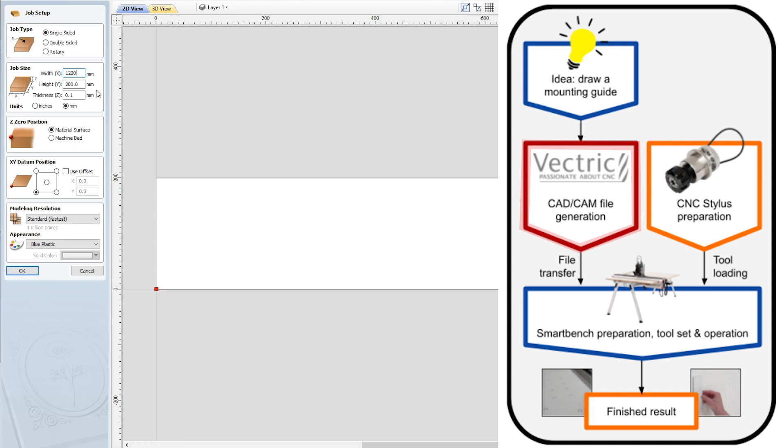We're first going to take you through creating a toolpath using Vectric and the drag knife gadget. Next, we will focus on setting up CNC Stylus with the vinyl cutting cartridge, including selecting the correct blade type for the vinyl we're using, and then setting a blade depth.

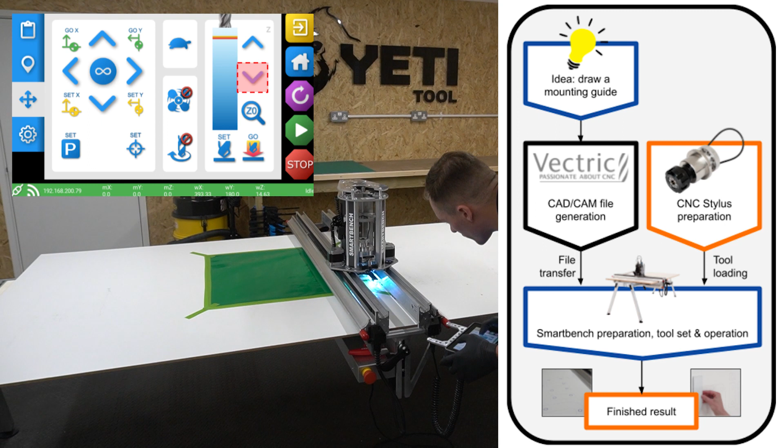We'll then go through the operation of SmartBench, which starts off with setting an XY datum, setting a Z datum, and then starting the job right through to completion. This tutorial will be split into two sections. Part 1 will focus on file generation, and Part 2 will focus on SmartBench operation.

Before we can cut files, we need to do the design work in some CAD/CAM software. The CAD/CAM software will then export the toolpaths for SmartBench.

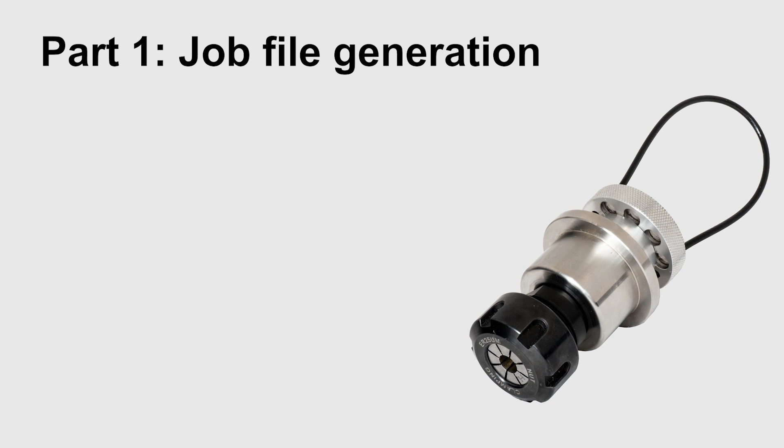So for Part 1, file generation. For this tutorial, we'll use Vectric VCarve Pro for our CAD/CAM software. Vectric works by defining a general job setup, drawing out basic features in 2D, assigning toolpaths to the drawn features, and exporting the toolpaths to a file.

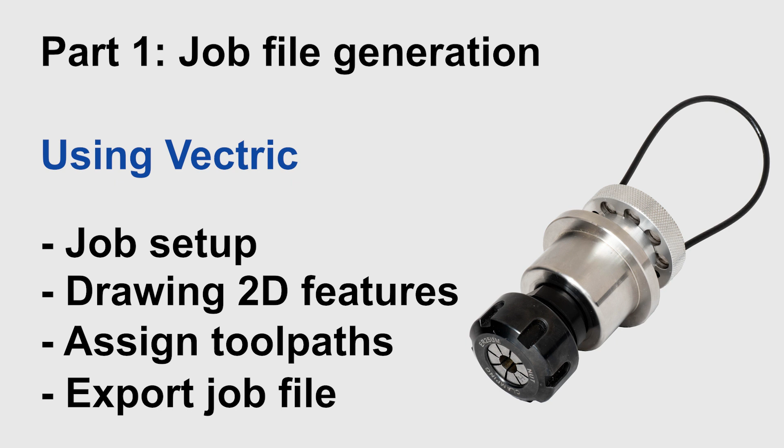Let's get into it. So we're going to start in Vectric by creating our job setup. We're going to first create a new file. So we click New File up here. Once we've created the file, we can now select our job type. For this, we're going to use single-sided.

We're now going to enter our width in the X-axis, which is this axis across the bottom of the screen. And we're going to type in here 600 millimeters. And then we're going to set our height, which is in the Y-axis, to 560 millimeters. And our thickness in Z will be 0.1 millimeter.

We'll then choose material surface as our Z datum position. And our XY datum will be the bottom left-hand corner as shown on the screen here. We can then press OK, and this will now create our job setup.

Once we've created our job setup, we need to now import our vectors, which will be our animal stickers. We can now press Import Vectors, which you'll find under File Operations, which will open our open window. We can now click Animal Stickers, and we can press Open. This will now open our stickers, and you can see here they are individual vectors.

We now need to group our stickers, so we can use the mouse to select them all, right-click Group Objects, and these will now operate as one individual object. We can now go to Edit, Align Selected Objects, and Center in Material to ensure these are centered to our job.

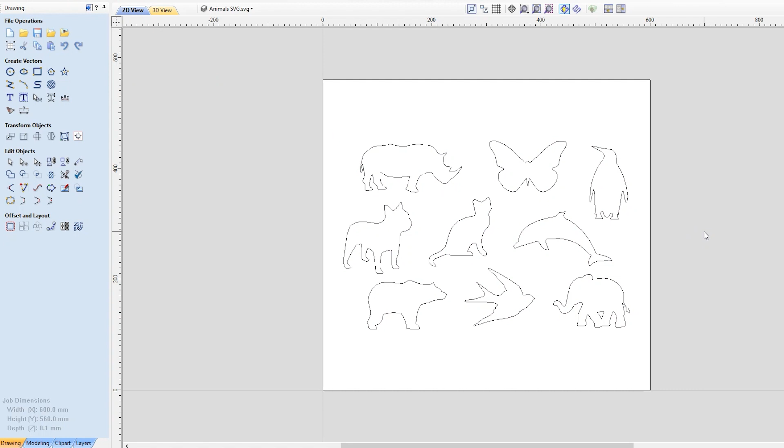Before we create the drag knife toolpath, we now actually need to separate these back into their individual objects. We're now going to select the object again, right-click, select Ungroup Objects, and ungroup back to original layers. And you can now see the objects are individual. This will allow us to create our drag knife toolpath later.

When we create a drag knife toolpath using the gadget in the next step, we can use a dummy tool. This means we do not need to add a new tool to the database. Here we can select any tool. In this case, we're going to select the end mill 0.1 millimeters.

It's important to note here that the gadget will automatically calculate the toolpath from the center of the tool, so we do not need to worry about the diameter of the tool. Your tools can be found up here in the Toolpaths tab, Tool Database, and you can see our tools here already created.

We are now going to create a toolpath using the drag knife gadget in Vectric. This comes pre-installed into Vectric, so you don't need to install anything. The drag knife toolpath is needed as we need to accommodate for blade offset, which I'm going to explain to you now. Blade offset refers to the tip of the drag knife and the offset.

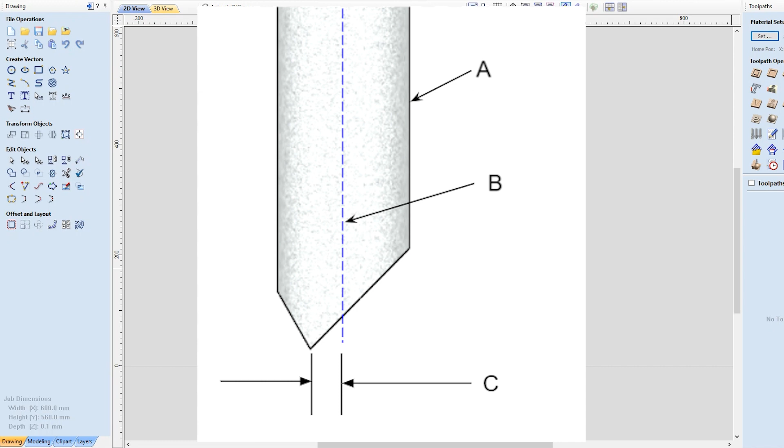The tip of the drag knife is offset by a small amount from the pivot center of the tool. This allows it to swivel as it cuts. This offset value specifies the distance between the central axis B and the tip C. It's important to note here that the offset we'll be using is 0.2 millimeters.

So we're now going to create our toolpath. We do this by first selecting all of our objects. We can do this by clicking and then holding Shift between clicks to select each individual item. Or we can use our mouse and drag and select these as a whole.

Once we have our item selected, we can go to the gadgets at the top, click on Drag Knife Toolpath, and then we have our drag knife toolpath window. Here we need to enter the following values. So we're going to use a cut depth of 0.1 millimeters. And we're going to use a swivel depth, which is the depth at which swivel actions are inserted, as 0.05 millimeters. This should be shallower than the cut depth of the appropriate tool.

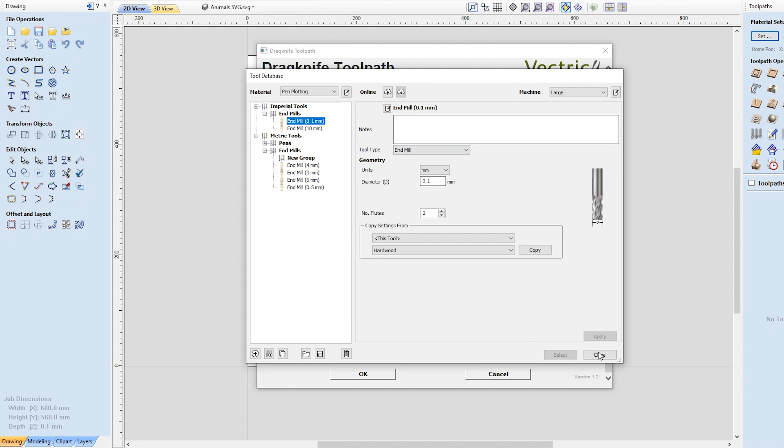Passes will be set to 1, and we can untick the vector start points box. Our blade offset, as explained earlier, is going to be 0.2 millimeters, and our tolerance angle will be 10 degrees. Here, as mentioned before, we're going to use a dummy tool. We already have here selected a 0.1 millimeter end mill, which is in our pen plotting tools we created in the earlier video. We can now press OK, and this will calculate our drag knife toolpath.

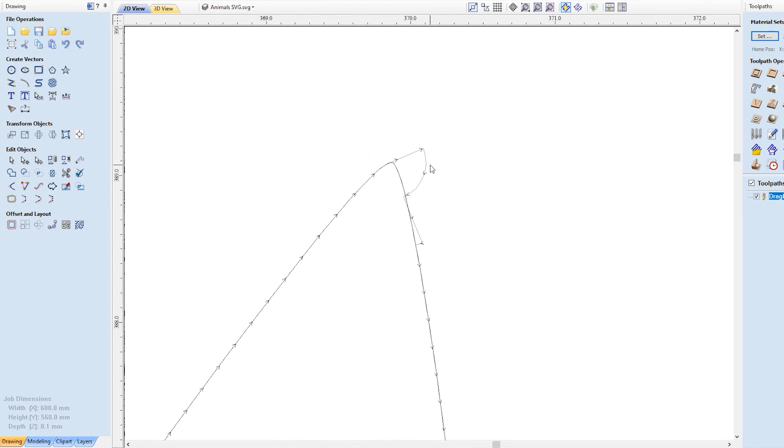If I zoom in on these sections, you can see how the drag knife toolpath is different as it adds extra movements for swivels. You can see this on various different corners. Our drag knife toolpath is shown over here. So now we have our toolpath. We're going to export this as a GCode file for SmartBench to understand. We need to first select our toolpath, which will then be highlighted in blue under the toolpaths.

And now we can press save. We're going to make sure we are saving the selected toolpath, and the toolpath name will be shown here, which will be saved. We can select our post-processor as Yeti Tool SmartBench, and we can now press save toolpath. We can save our toolpath here. In this case, I'm overwriting a previous file called animal stickers, and press save. We're going to press yes to replace the file. This has now saved our GCode file, ready to transfer to SmartBench.

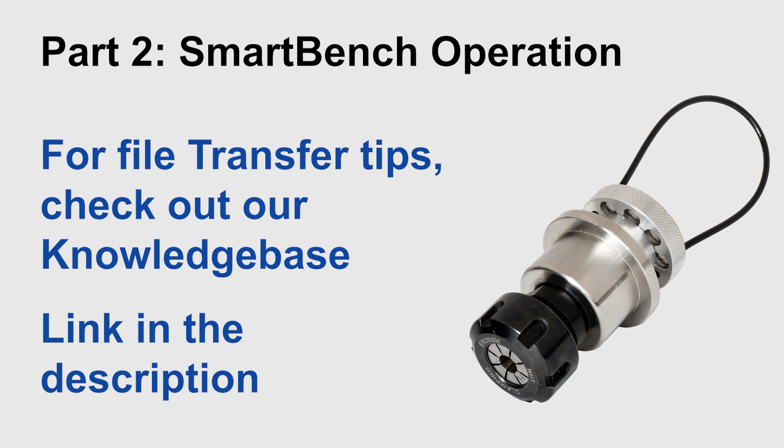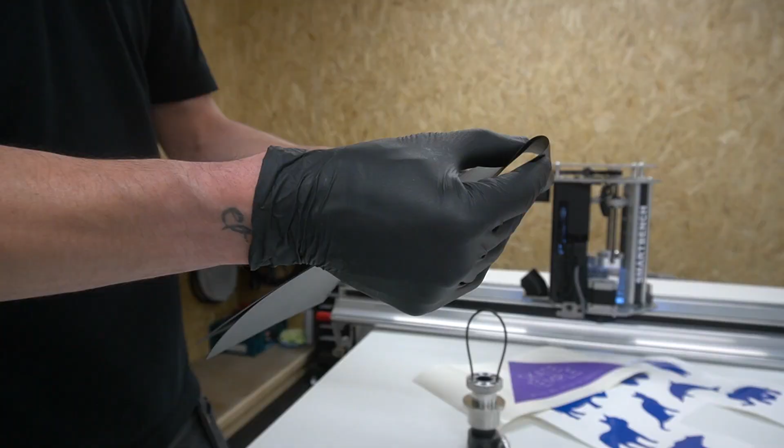Before we get into the technical data, let's look at different types of vinyl. There are 3 different main types of vinyl. There is self-adhesive vinyl, which is perfect for signage and branding. This comes in many different colours and thicknesses, which normally has a paper backing, which you can then peel away. You can also process heat transfer vinyl, which is great for t-shirts and clothing. Heat transfer vinyl does not have an adhesive backing, instead is fused to clothing using heat such as an iron. You can also source much thicker, rigid vinyl, which comes in a varying range of thicknesses.

CNC Stylus has been designed to process thinner materials such as self-adhesive vinyl and heat transfer vinyl. We're going to focus on these in this tutorial. You can potentially process thicker, rigid vinyls, but this needs to be taken with a different approach. One more thing to note is where can you buy vinyl from? You can buy vinyl from most online shops.

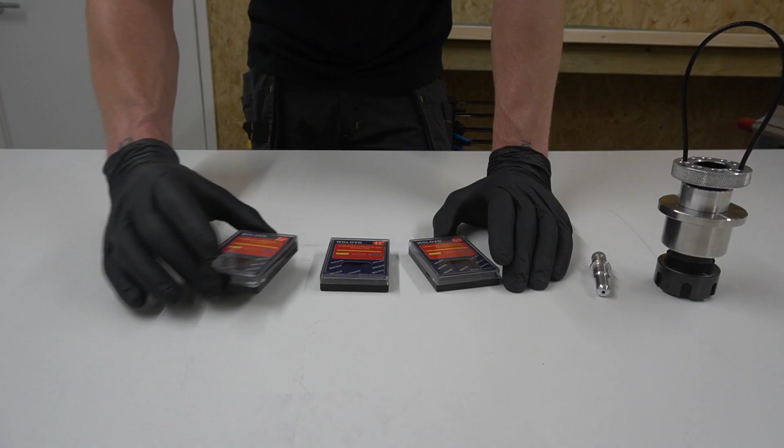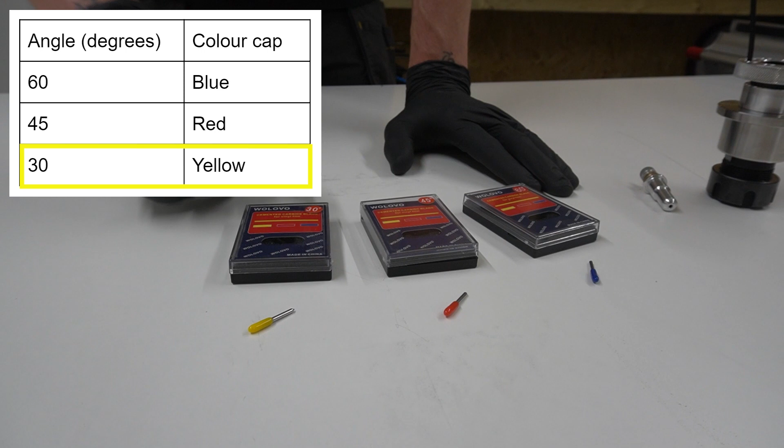What blade should I use? There are 3 different blade types, which are defined by their angle. We've included different blades in the box, which are 30 degree, 45 degree, and 60 degree blades. How to identify which blade is which? Blades ship with a protective cap, and its colour indicates the blade angle. Watch out though, because these can easily be mixed up. Yellow indicates 30 degree blades, red indicates 45 degree blades, and blue indicates 60 degree blades.

What are the different blade types used for? The steeper the angle, the deeper the blade can reach, such as 60 degree. Therefore, this is used for cutting thicker materials. However, this can add more cutting load and can sometimes cause tearing. A shallower angle, such as 30 degree, has less cutting load. This cannot reach as deep and therefore is used for thinner materials. A good rule of thumb is to use as shallow an angle as the thickness will allow. How do I change a blade? The blade sits inside the vinyl cartridge and is held in place by a magnet which sits on a bearing.

This allows the blade to swivel and rotate. The blade can be removed by pressing the ejection pin and pulling the blade out from the cartridge. To reload the blade, simply push the blade back into the hole. When you finish using your blade, be sure to replace the protective cap. This will stop your blade from getting damaged or blunted, and the colour will help identify the blade angle.

What spoil board should I be using? For this project, we're processing thin vinyl, so we can actually use the same technique as we used for drawing with CNC Stylus. We're going to show you a few clips of those videos now. Although we're using paper, it's exactly the same for using vinyl.

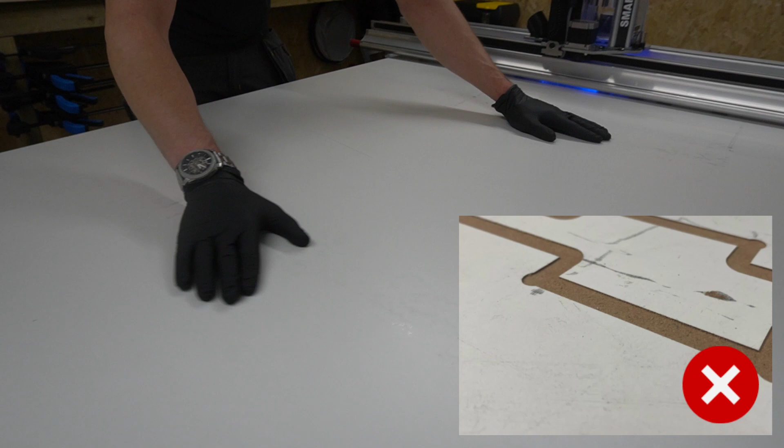When drawing with CNC Stylus, we need to ensure we use something rigid and flat. We'd recommend using a 12mm double melamine faced MDF board. This is to ensure we have a smooth surface to draw on and a smooth surface for our lower wheels to roll along.

Do I need a self-healing mat? If you are only drawing or cutting thin materials which have a backing paper, then you only need a flat, rigid spoil board as discussed earlier. If you're cutting rigid materials all the way through, or if you're locking out the movement of CNC Stylus, then you may require a self-healing mat which you can bond to your spoil board. In those examples, that would allow the blade to punch all the way through the material without blunting or damaging the tip.

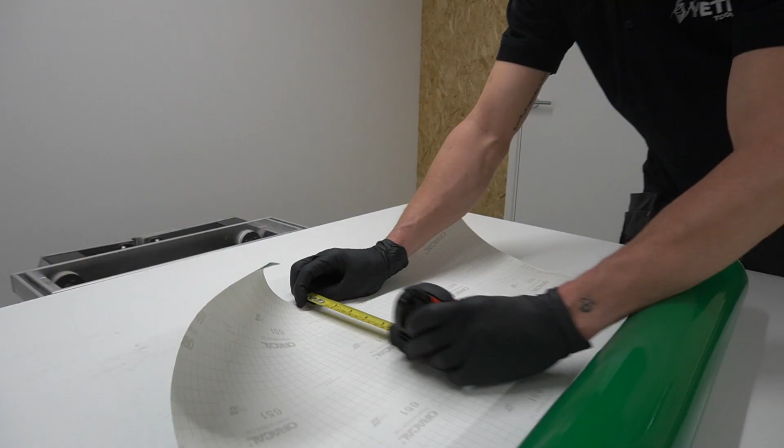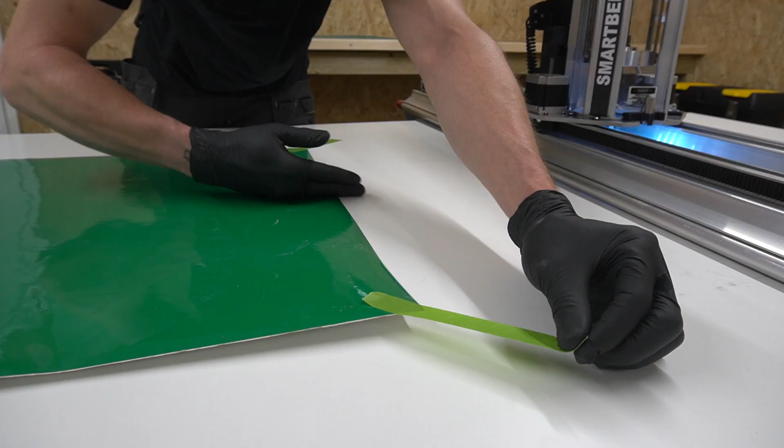How do I hold material down to cut? Just like in our drawing tutorial, we're going to use frog tape to tape along all edges of our material. We're going to start by cutting our vinyl to the size of our job as defined in our file. Just like before, we're going to use frog tape to tape down our vinyl. We're going to tape along all the edges, and we're going to start by taping the corners, and that allows us to keep it as flat as possible. Now that's all taped down, ready for our next step.

We're now going to set the X-beam for cutting vinyl. Again, this is exactly the same as when we process paper for drawing. We're going to show you a few of those clips now. Please don't be alarmed if you see paper, it's exactly the same for cutting vinyl. When using CNC Stylus, we need to ensure the wheels on our upper beam do not roll along the material surface, as this can cause creasing and tearing. To do this, we'd actually recommend using a gauge, something like a piece of material, to ensure our wheels are set a fixed distance above the paper.

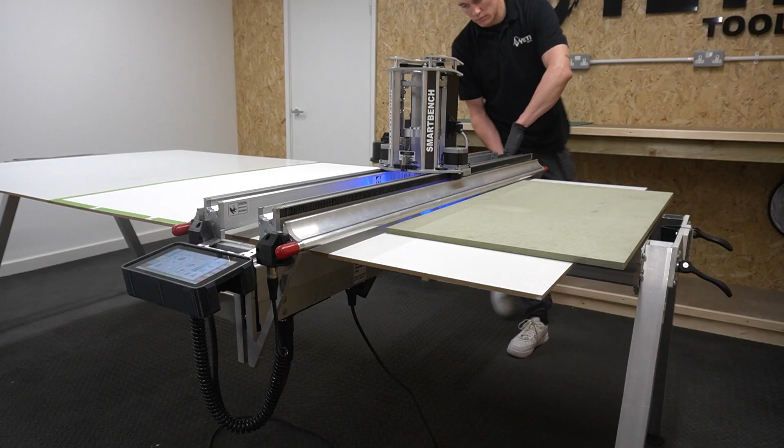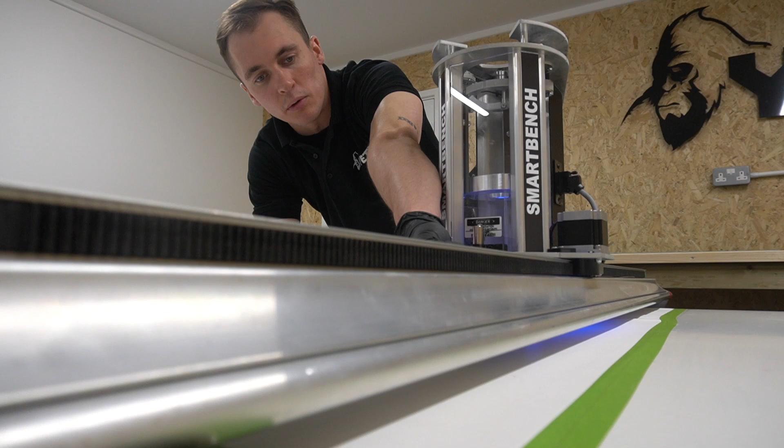So as you can see, from using our material as a gauge, we now have a fixed gap between the wheels and our paper, and this is consistent from this wheel on one side straight across to the wheel on the other side. So now we can tell our beam is nice and flat. One important thing is to ensure our clamp handles are tightly secured so that our beam cannot move up and down while we're drawing.

We're now going to talk about one of the most important factors when cutting vinyl. Setting the blade height is the most important factor because if your blade height is not correct, you will either not cut deep enough into your material or you'll cut too far through your material through the backing paper. We're first going to make sure we select the correct vinyl blade. For this thickness of vinyl, we're going to use the 45-degree angle blade, which has a red cap.

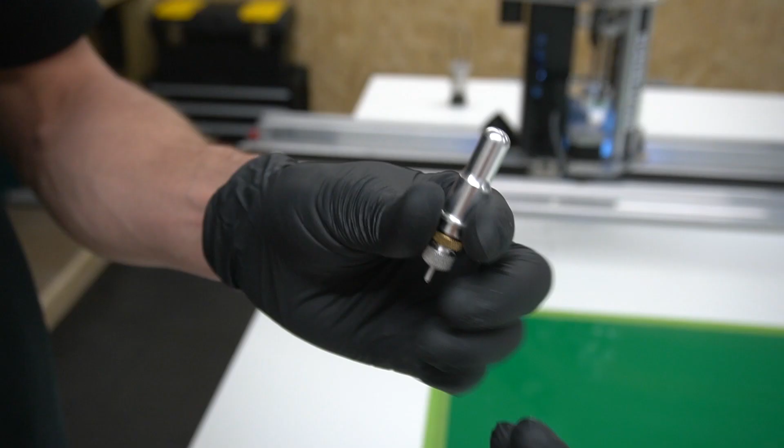To set the blade height, we're going to first insert our blade into the vinyl cutting cartridge by first removing the red cap and placing it into the cartridge. We can now adjust the gold locking ring by loosening this off, and we can now twist the inner barrel of the cartridge to extend the blade from the barrel.

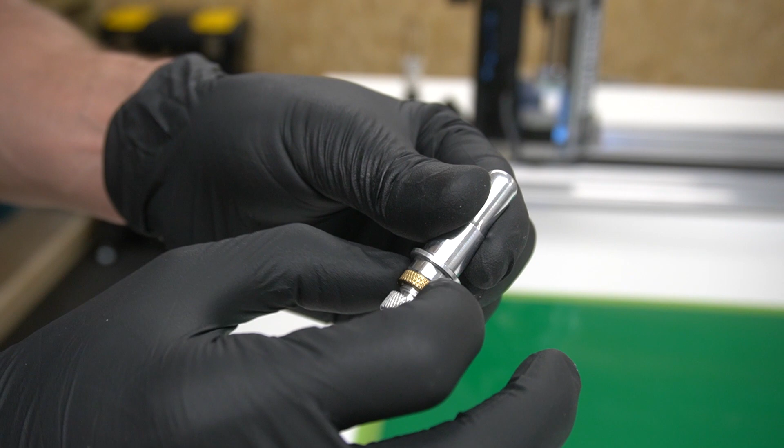The vinyl cartridge works by allowing this surface of the barrel to run along the top surface of your material. So we need to ensure the blade only extends the thickness of the material we wish to cut. As the blade is very, very small, we've included a checking jig in the box to allow you to easily see the blade.

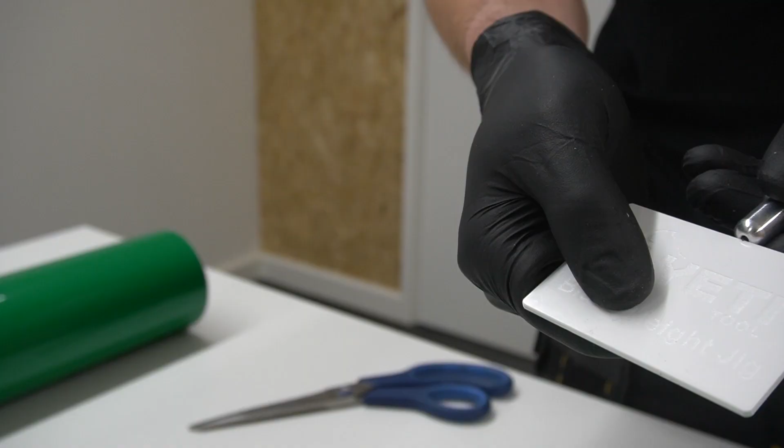We're going to align the cartridge with the side, and we can now visually see the blade extending from the barrel. This is going to make it easier for us to adjust. Now that we can visually see the blade is extending from the cartridge, we're going to make some micro adjustments to ensure the blade is set to the correct depth.

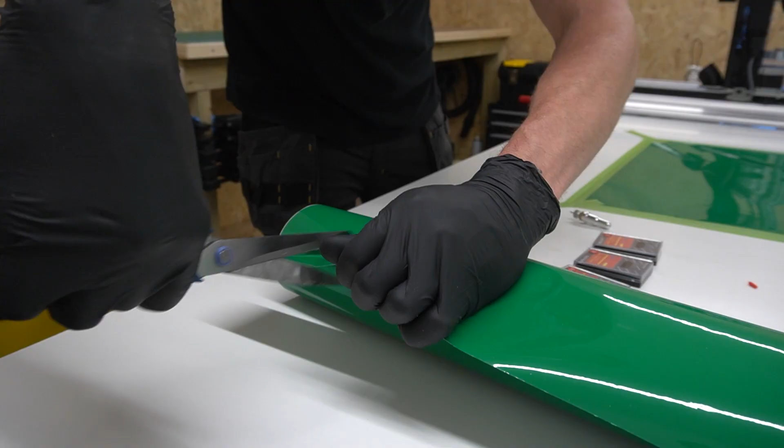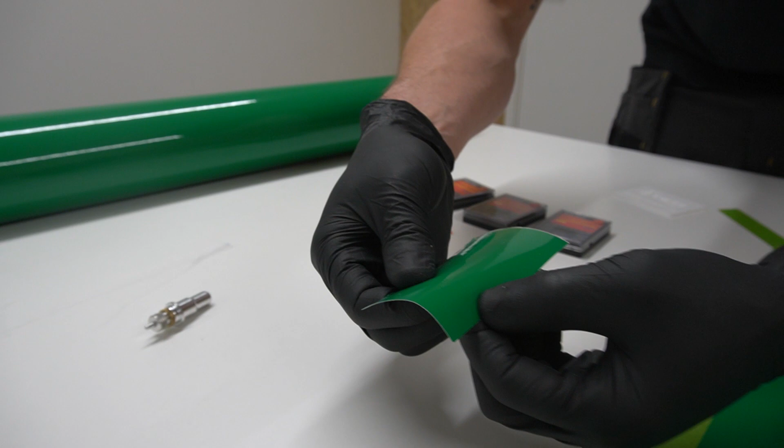We don't want to be cutting through the backing paper, but we do want to cut all the way through the vinyl. To do this, we're going to cut a small sample. Laying your vinyl flat on your bench and applying some light pressure, drag your vinyl blade across the surface. You can do this multiple times. We can now check to see if the vinyl cutter has punctured the back paper. We can see here this is cut through the vinyl, but we can check to see that the paper is in fact still intact.

Here we have a few examples to show what happens if the blade does not stick out enough from the cartridge, if it sticks out too far from the cartridge and punctures through the backing paper, and here is one that is absolutely perfect. We've cut through the vinyl layer, but we have not cut through the backing paper. This one shows we have not cut through the vinyl layer on the top at all. So the blade was not extending far enough from the cartridge.

The next one is an example of where the blade was sticking out too much from the cartridge. This is cut through both of our layers, so you can see it's cut through the vinyl in the green and the white backing paper. The final example is where we've set the blade height to be exactly perfect. We've cut through our top vinyl layer, which you can see me peeling away here, but we have not punctured through the paper backing.

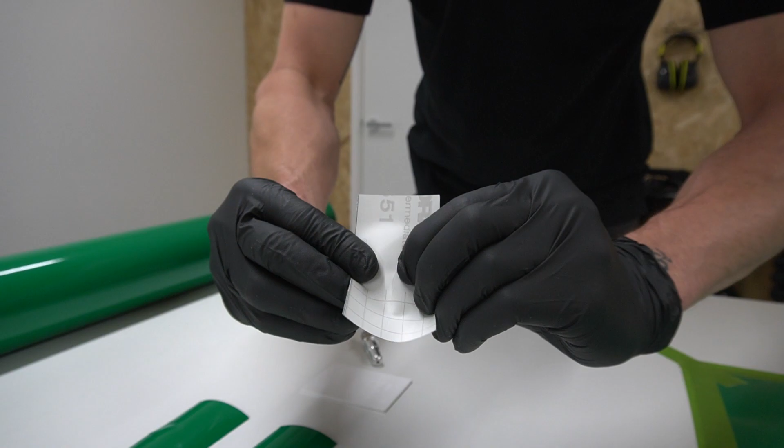To give you an idea of how far the blade extends to achieve that, we can now align our cartridge with our jig and see that the blade only extends 0.3 of a millimetre, roughly, which is the same thickness as our vinyl. This is not much at all. The last thing to do is check your locking ring is tight so that the blade height does not change during your job.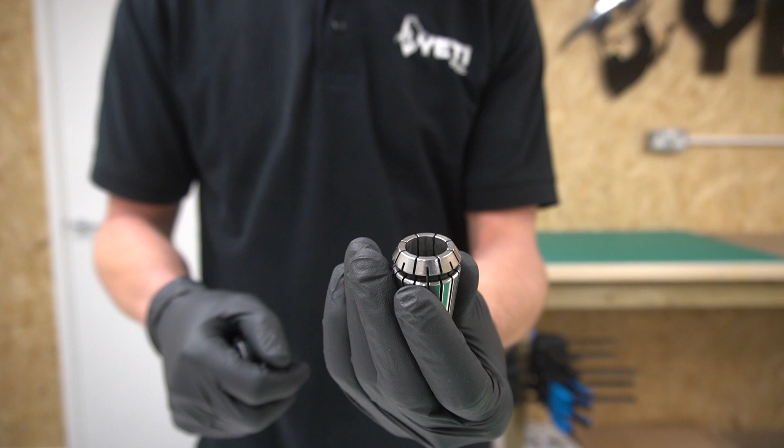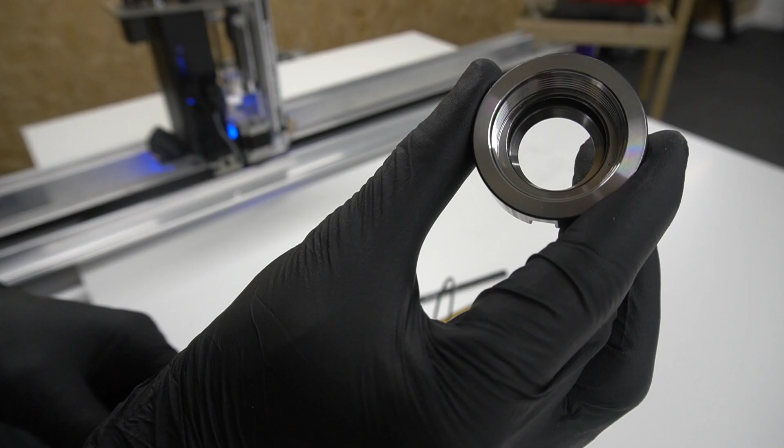How do I load a vinyl cutting cartridge into CNC Stylus? You'll first need to select the correct size collet. For the CNC Stylus and the vinyl cutting cartridge, we select size 16 to 15. The nut, which features an eccentric washer, requires the collet to be fitted from a specific side. Here you can see the thinner part of the washer at the top and the thicker part of the washer at the bottom.

Holding your nut with the thicker part at the bottom and the thinner part at the top, insert your collet and push up until it clicks into place, and then push down to release. If you've fitted the collet correctly, you should be able to invert the nut and the collet will hold in place. Next, we can pre-fit our nut and collet to the stylus. Now that we have the collet fitted to the stylus, we need to load the vinyl cutting cartridge. When we're loading the cartridge, we need to focus on clamping onto this shoulder here.

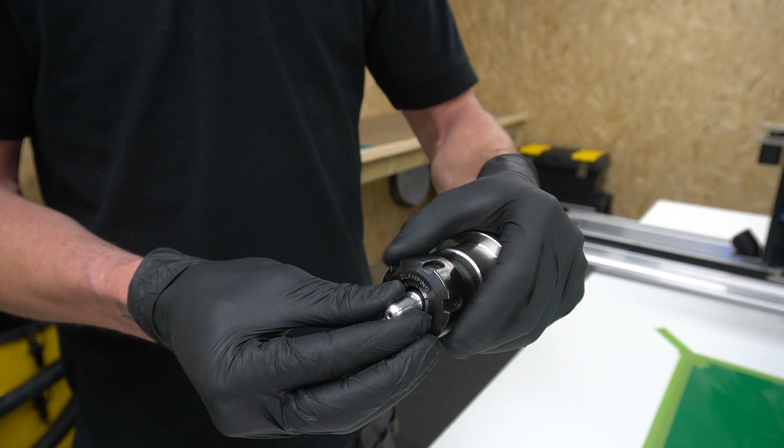We can insert the vinyl cutting cartridge into the collet, and while holding it with one hand, we can tighten the nut until it grips. We can now micro adjust so that the cartridge is straight and tighten. The vinyl cartridge is mounted in the stylus. You should have an extension of around 15 millimeters from the face of the nut to the tip of the vinyl cutting cartridge.

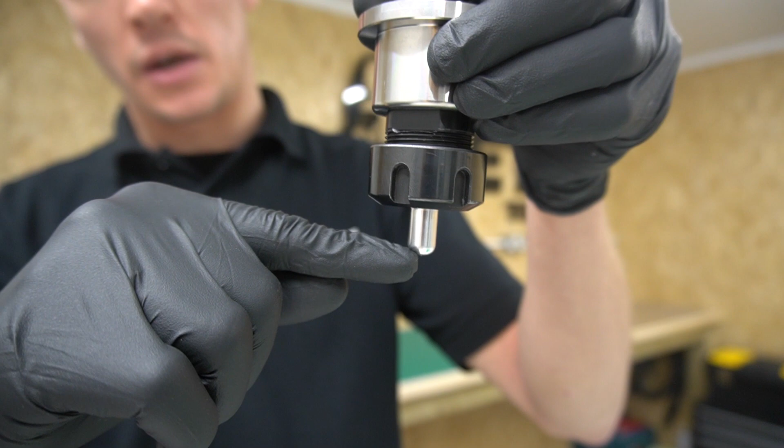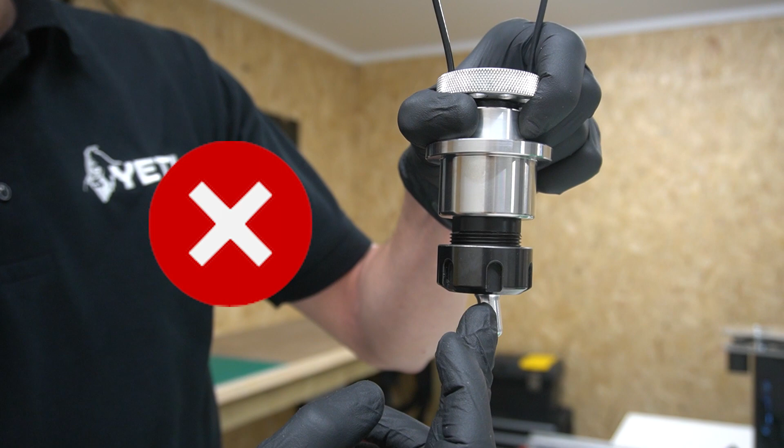One final thing to note is to ensure that your vinyl cutting cartridge is parallel with the axes. Here is a very bad example of how the vinyl cutting cartridge is not parallel with the axis. Here is a good example of a parallel setting. It's now time to load CNC Stylus with the vinyl cutting cartridge into SmartBench. This is exactly the same as we did for the pen plotting video. Here's a few clips of us doing that.

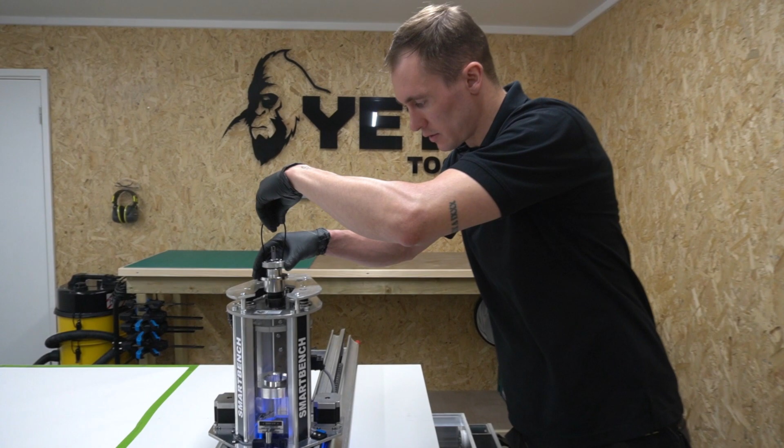We're now going to load CNC Stylus into SmartBench. Using the loop, we're going to lower the stylus into the Z head and ensure the boss sits securely and flat into the collar.

We're now going to use our 6mm driver to tighten our hex bolt. By inserting the tool, the rule here is to tighten the bolt until you feel resistance and then continue to turn for 1/4 of a turn. This does not need any more than 5 Nm of torque.

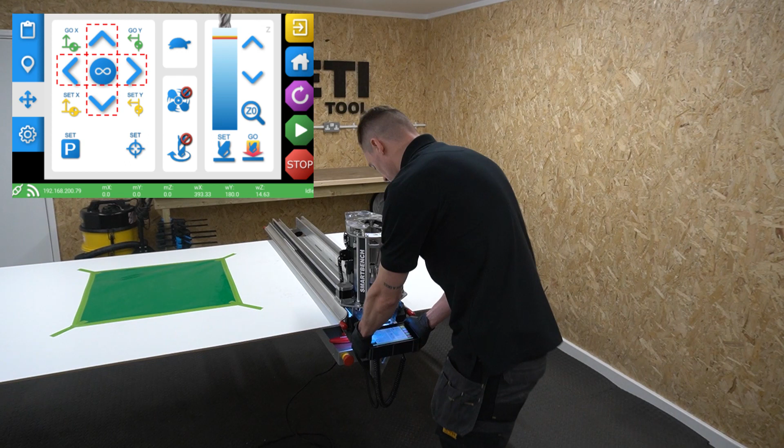So now we've selected the vinyl, the correct blade to use, and we've loaded the vinyl cutting cartridge and stylus into SmartBench. We're going to set our XY datum. This needs to coincide with our Vectric file which we created earlier. So I'm going to move the axis in the Y and in the X, and we're going to center the tool over the corner of our vinyl.

Going to move the stylus down a little bit so I can get a closer look. This looks like a good starting point, so we're going to set our datum and press yes, and you'll see a green light to say this has been accepted.

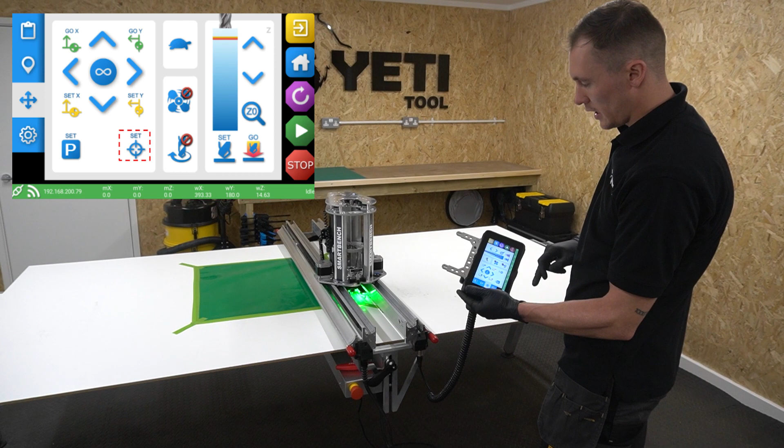Now it's time to set our Z datum. We can't use the probe plate in this case, so we need to do this manually. We're going to move the stylus down until the point of our vinyl cutter touches the material. We're then going to move this down a further 2 mm. This is going to put CNC Stylus in the middle of its range of movement. This means that we can accommodate for flatness across our sheet and our material.

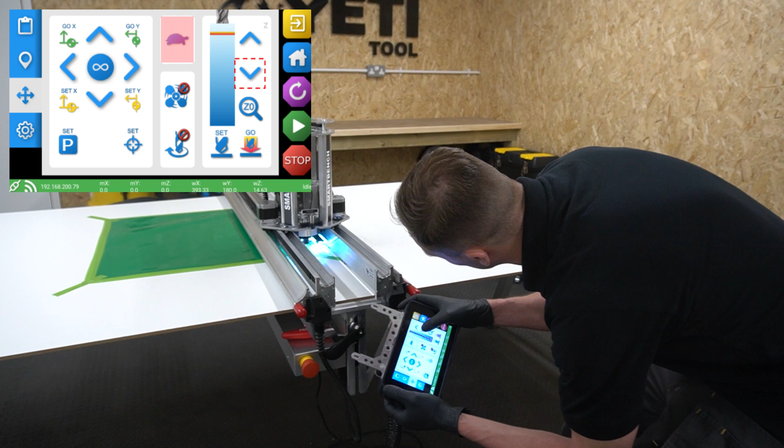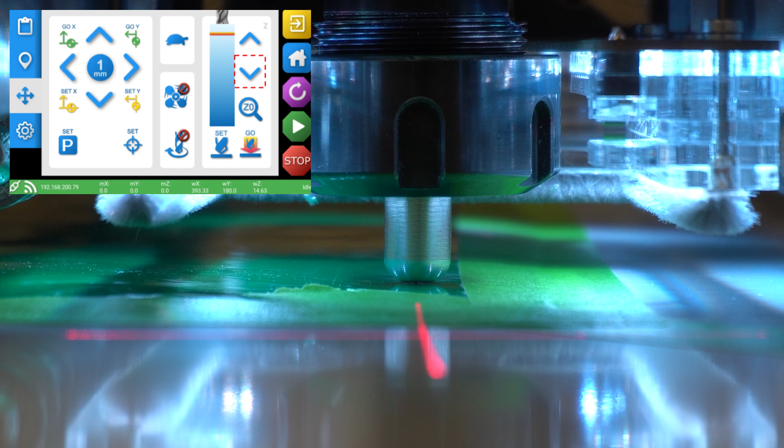We're going to first move our Z axis down so that our stylus is closer to the material. I'm now going to switch to the tortoise mode so that it moves the axis a little bit slower. And just as we get to the top of the material, I'm then going to stop. We can now switch to move in 1 mm increments, and we're going to move this down 2 mm. 1, 2, and we can now press set, and you can see the green light which will then accept our Z datum.

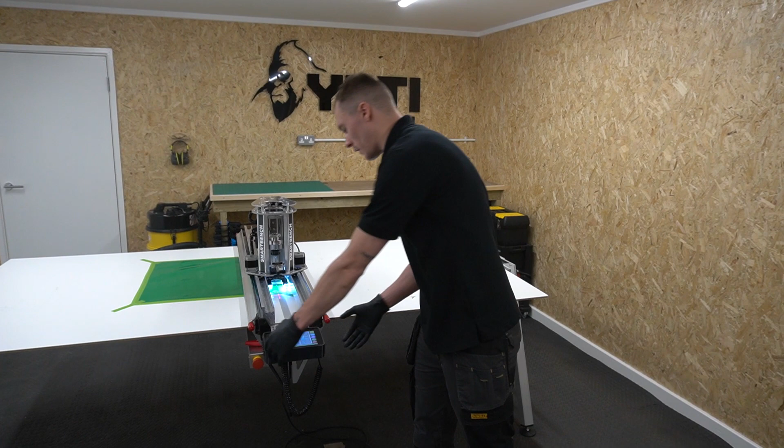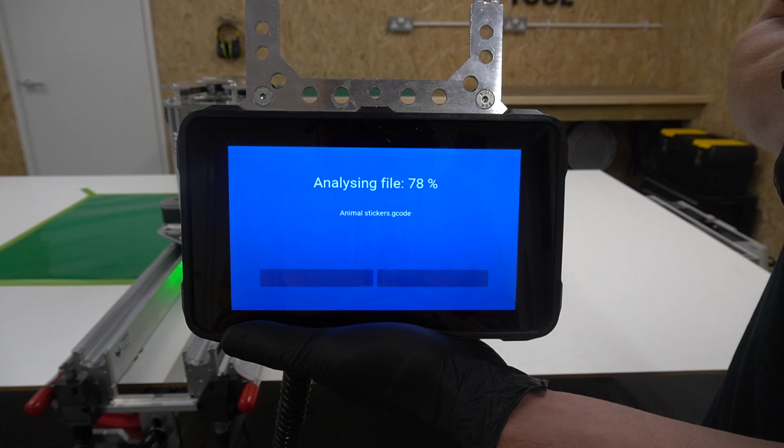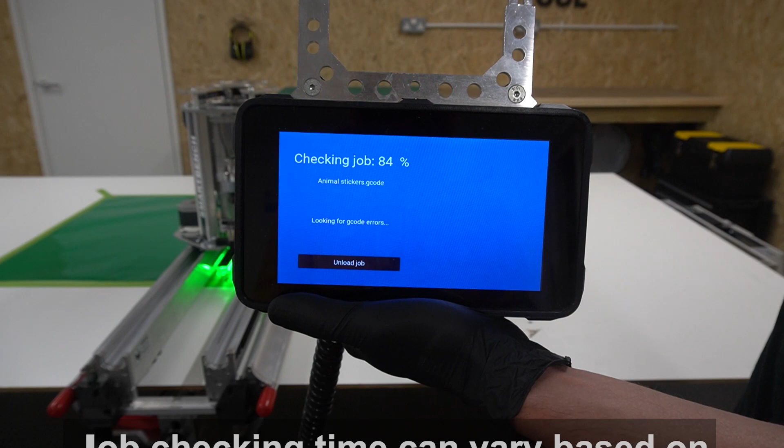Now we're ready to start our job. We've already sent the file to the console, so we're going to select our file and get it loaded. We're now going to open the file chooser, select our job, and after the file's been analysed, we're going to check our job for errors. Our file has now been checked and is good to go. We can now press start.

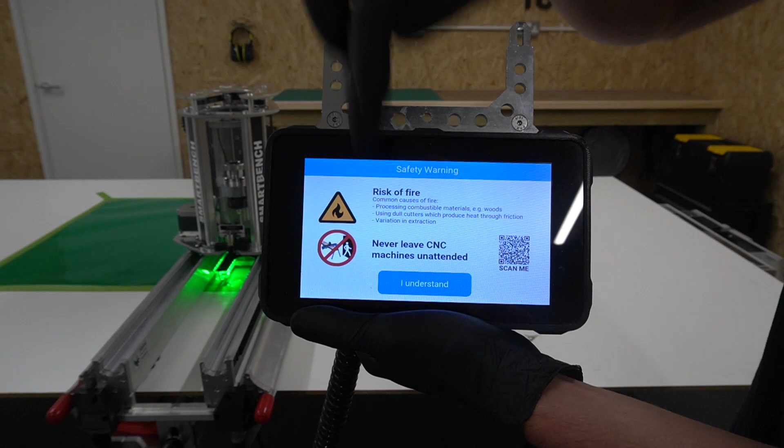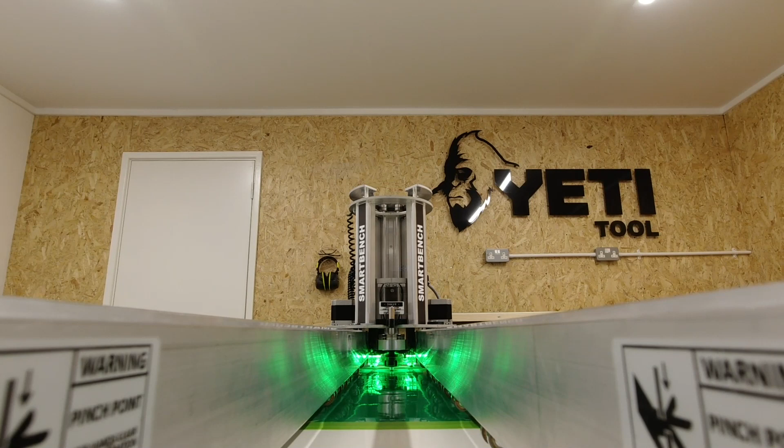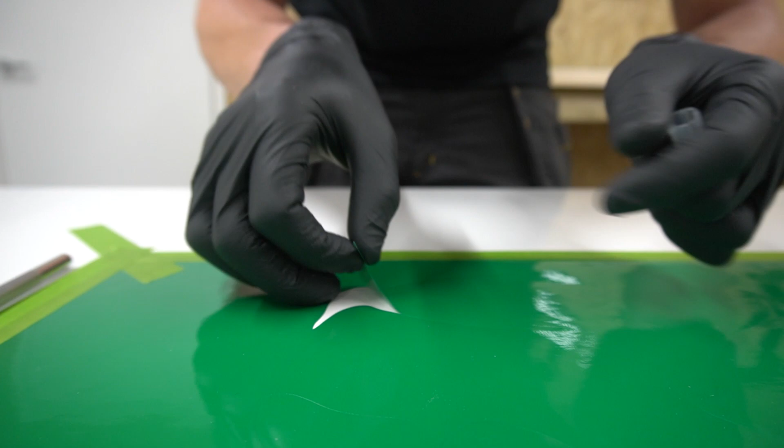Now that our job's finished, we can see the job completed screen, and this job took 4 minutes, 10 seconds. Now we're going to show you how you remove the vinyl cuttings from the paper. Here you can see our finished sticker.

Not a huge fan of penguins, but I'm sure this will look great on my toolbox. There we go. Thanks for watching.

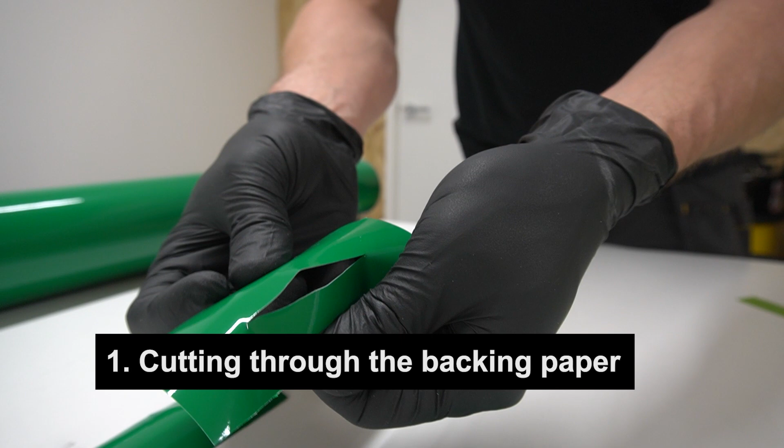We're going to show you some of the top 5 mistakes that we see when using vinyl cutter and CNC Stylus. The first one is cutting through the backing paper. You need to ensure you set the correct blade depth so you don't cut through the backing paper and the vinyl. We just want to be cutting through the vinyl layer to give us a clean sticker. If you start seeing this, it's worth revisiting our section on setting the correct blade height, where we use vinyl to check the blade depth. It's really worth getting this right to save your job.

Number 2 of our top 5 mistakes is ensuring your vinyl cutting cartridge is parallel with the axis. This is going to ensure you get a nice clean cut and there's no tears or breaks in the vinyl. If you start to see tearing at the side of your sticker, that will likely be the cause, so I'd go and double check.

The third biggest mistake we see is using a damaged or blunt blade. We'd recommend using a jeweler's loupe. We have an example here of a 9x magnification. It's not easy to see with the naked eye, so always double check your blades. A blunt blade can cause tearing and snagging at the edge of your sticker.

In at number 4 is selecting the incorrect blade angle. Be sure to replace your blade caps so you know which one is which. Remember, the larger the angle, the thicker the material, and the shallower that angle, the thinner the material. Finally, at number 5 is ensuring your vinyl is flat with no bumps.